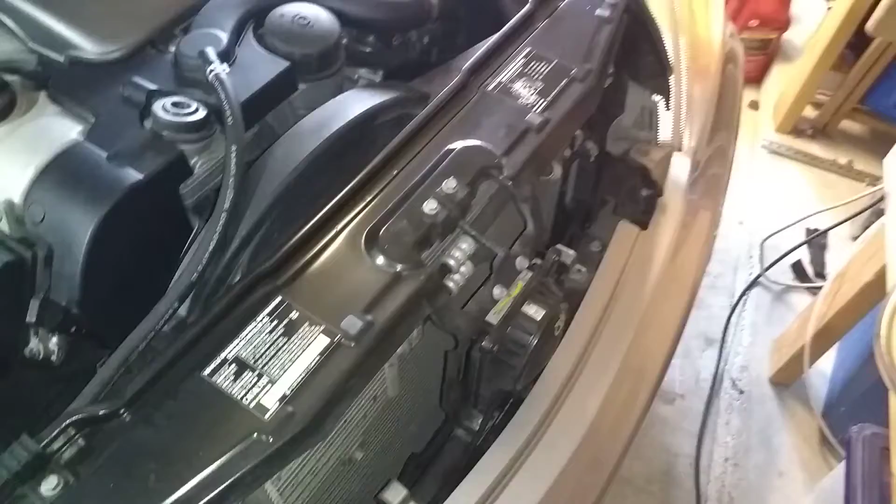So we got here a 2001 S600, W220 chassis. This is the version with the M137 engine. This is a Distronic upgrade I've been working on this weekend. So here you have the Distronic sensor. This is something I got off of eBay. I think it came out of a CL600.

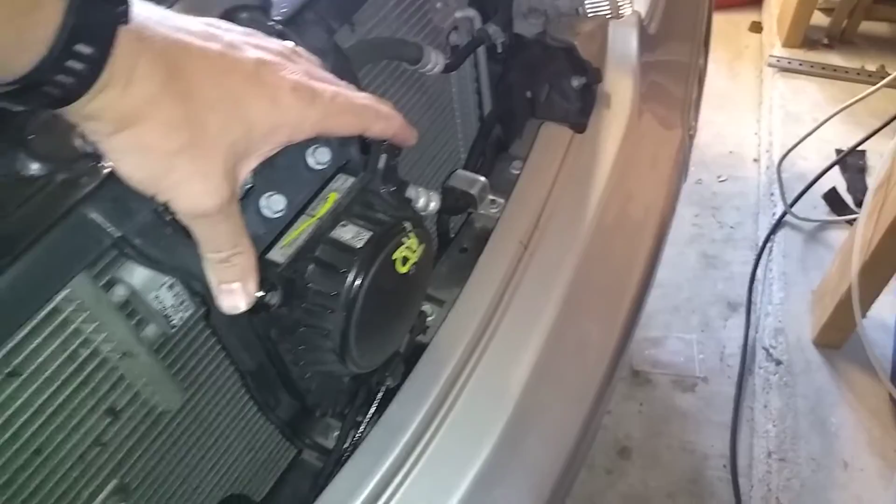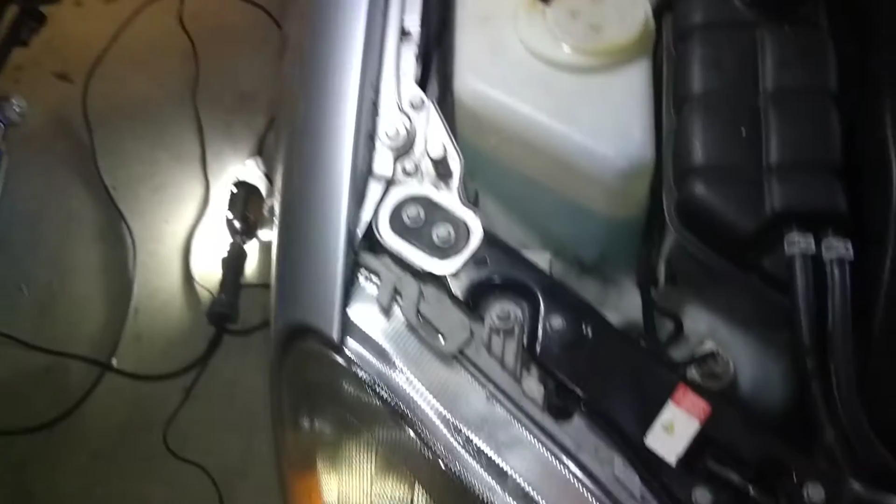Got the Distronic harness right here. The specific harness for this car was one that was only used for a couple of years, and it's not really available anymore. So this is actually an R230 harness, because these are much easier to get, but it's got pretty much the same cable output as the W220 or the S600, so not too much of a problem.

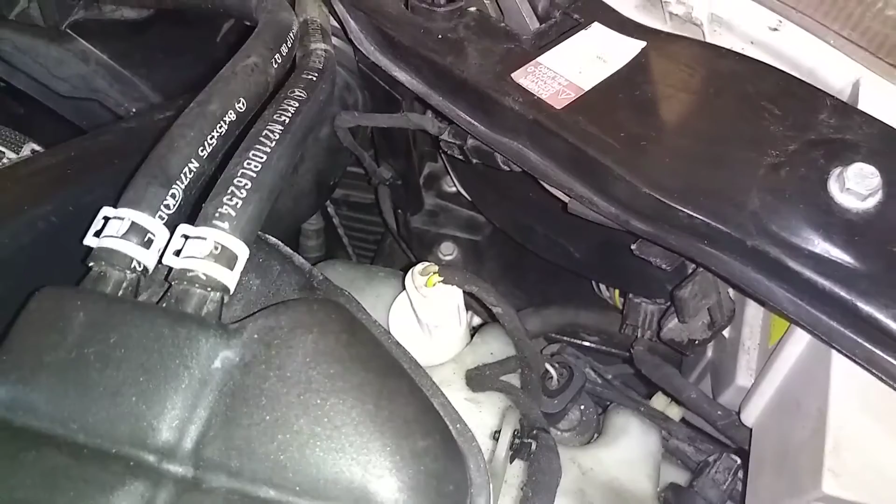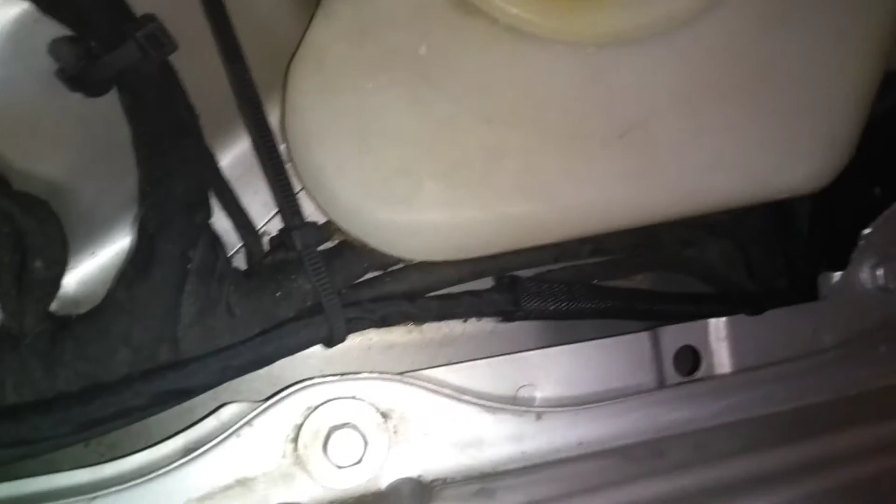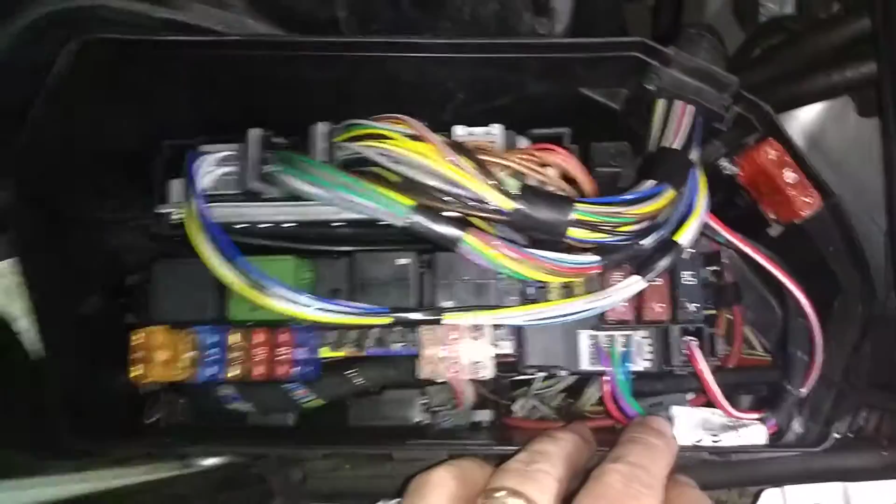I routed it underneath the headlight to make sure that everything went around properly. There was a little bit of extra slack here. It's just sort of loosely dangled under here. If you go around to the sides, see I routed the cable underneath this track here. This is more of the cable right here. It goes right into the right-hand SAM box and plugs into the second from the last fuse position right here.

Then it goes right through the firewall into the passenger compartment. There is a rubber grommet. You can see it right there in the middle of the screen. That's normally used by the R230 chassis. It's not necessary here because there's actually already a sort of a split grommet installed, and it's in the wrong spot anyway to kind of fit neatly within the race.

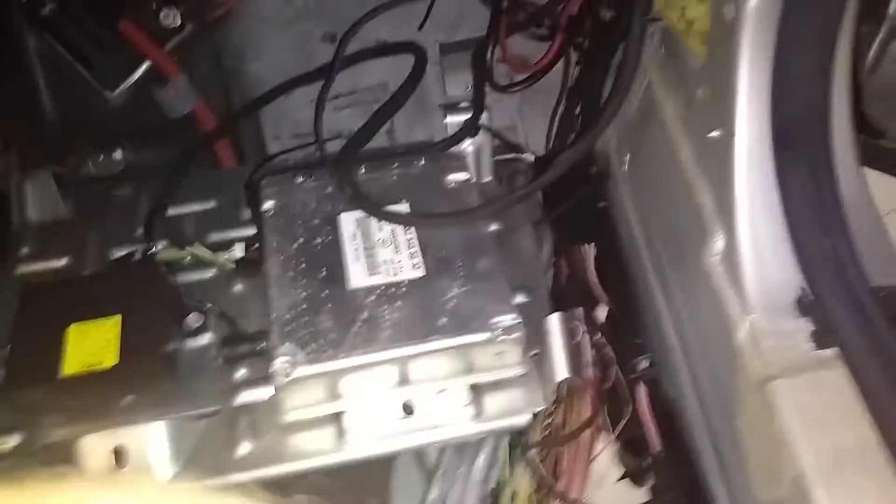Going around to the side, show you what else we did to get everything hooked up. Show you this before we button it up. So this is the actual Distronic ECU connected. We got the two connectors and the coaxial cable as well going out to the sensor. Over here is where it actually connected into the engine control unit, into the CAN bus. This is for CAN C right here. I got just a couple of solder joints.

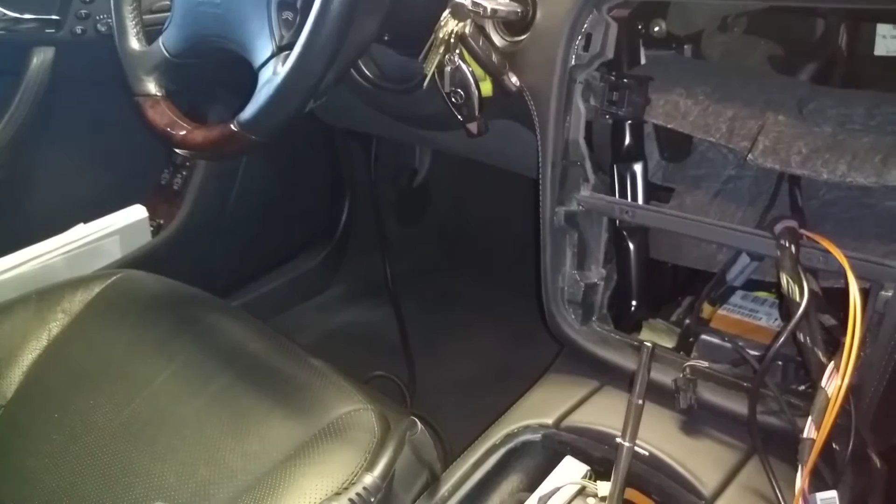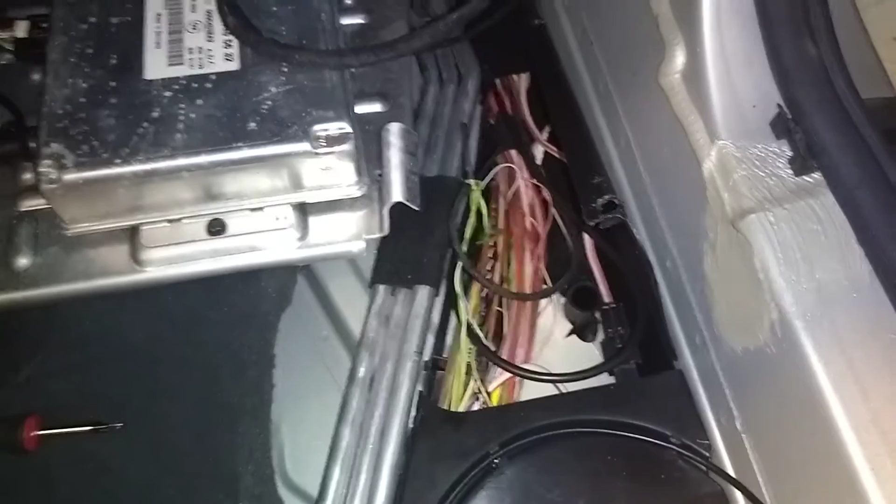This is the original wiring harness, the W220 wiring harness, and then this CAN bus wire here actually goes to the right-hand seatbelt tensioner. But normally what you do is you want to route all the way over to the driver's side and connect to the central CAN bus connection over on that side. But rather than doing that and tearing up the carpet on both sides, I just went ahead and wired it right into the seatbelt tensioner instead.

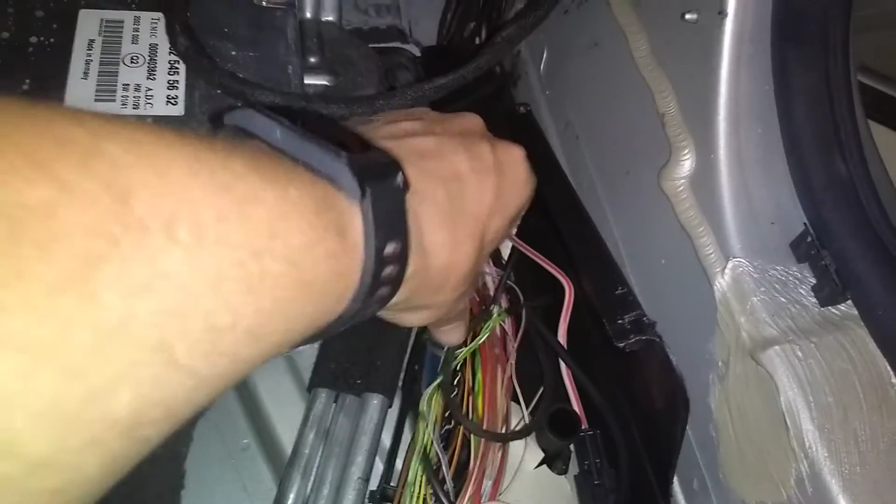You also need to connect to the diagnostic wire. So there's a pink wire on the W220. This kind of jacketed wire here is supposed to be pink. It's probably hard to see on the camera. And then this blue diagnostic wire also goes to the seatbelt tensioner. So basically all the wiring you need is right here in the passenger side, which is really convenient. So all you really have to do is take out this kick panel, plug everything in, do a little bit of soldering and some shrink wrapping, and you're good to go.

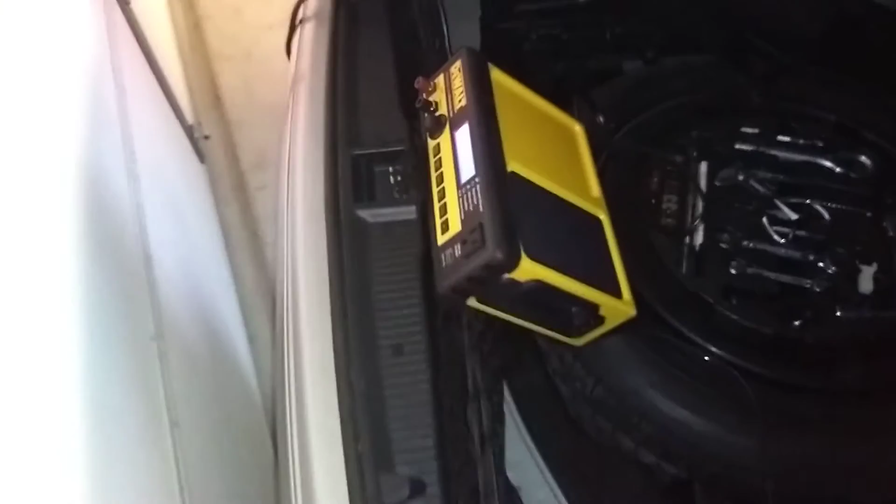So programming it was a little bit interesting because there's not a whole lot of documentation on how to do it. Here I've got a Star Diagnostic system, and it's plugged into the car right now. I'd say before you do any kind of programming, something that's really smart to do, and I kind of learned this over time, is put your car on a battery charger. I got this nice DeWalt unit here, 30 amps. The car uses 16.8 amps, just sitting idle without even the engine running.

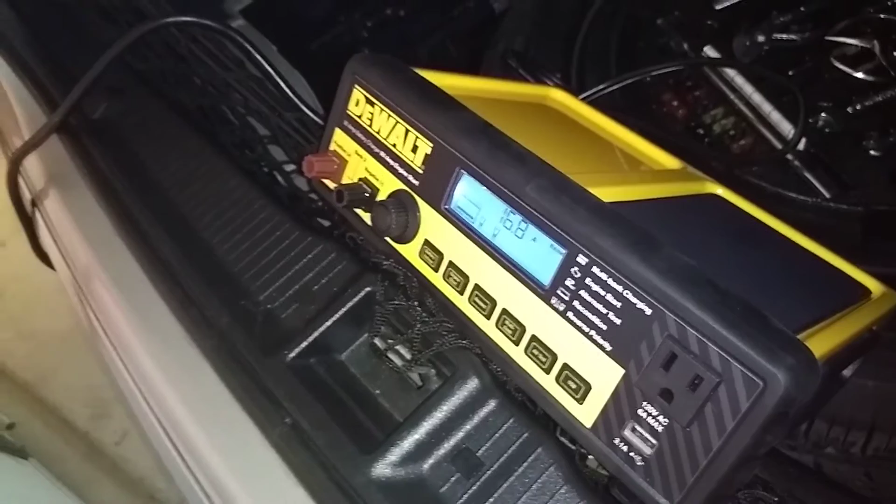So it will definitely be a big battery draw if you try to do any of this programming with just the battery, or you have to leave the engine running. So having one of these is really nice because it lets me keep the garage closed and not have to basically roast in a hot garage. Let's go ahead and go over here and take a look at some of the things we did for programming this device with the 2001 version.

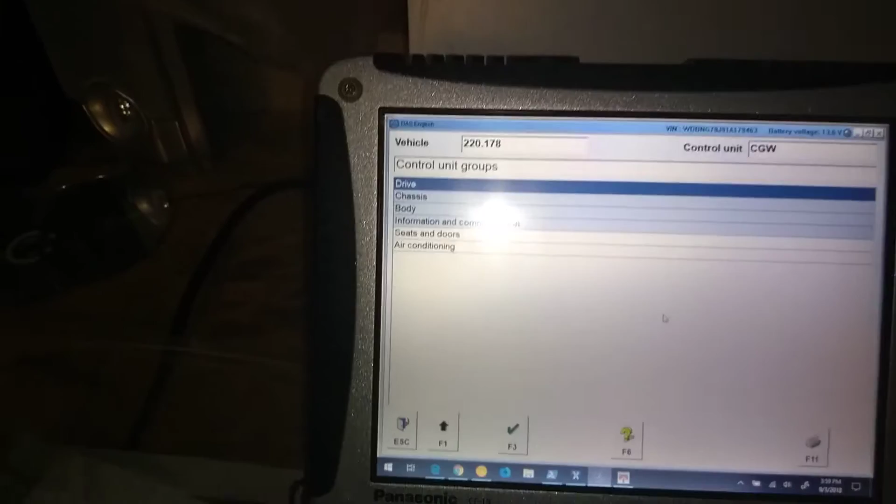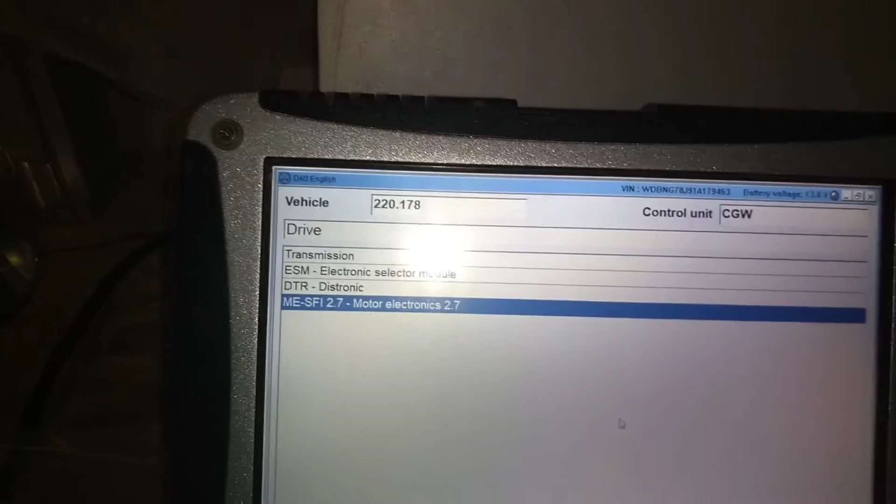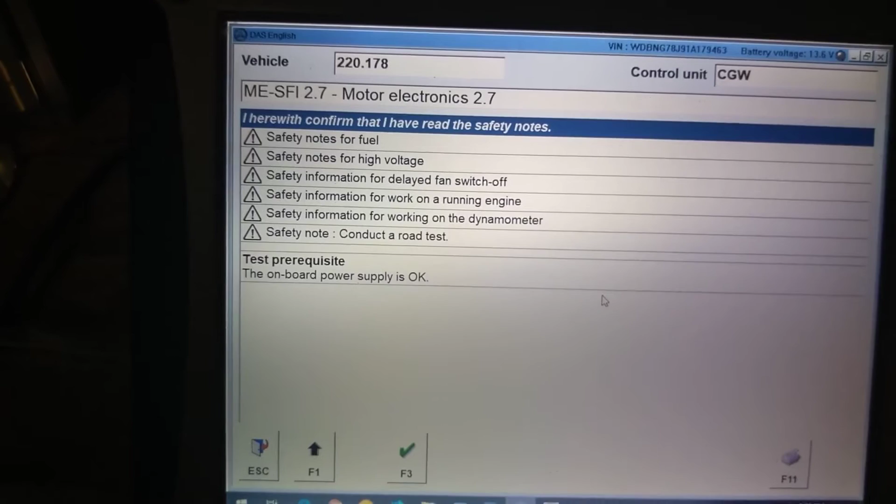So one of the first things you'll notice, so this is Star Diagnostics, I've got a wireless connection to the unit, is you'll need to update the engine electronics. I'm just going to turn off this light real quick. So this one has ME27, which is one I'd never seen before. All the other cars I've got have ME28 in them, but one of the first things you need to do when you start coding for this is, I'll go ahead and press F3, download all the adaptation data. If you don't do this, you'll get lots of funny errors, and it won't be really clear what's going on.

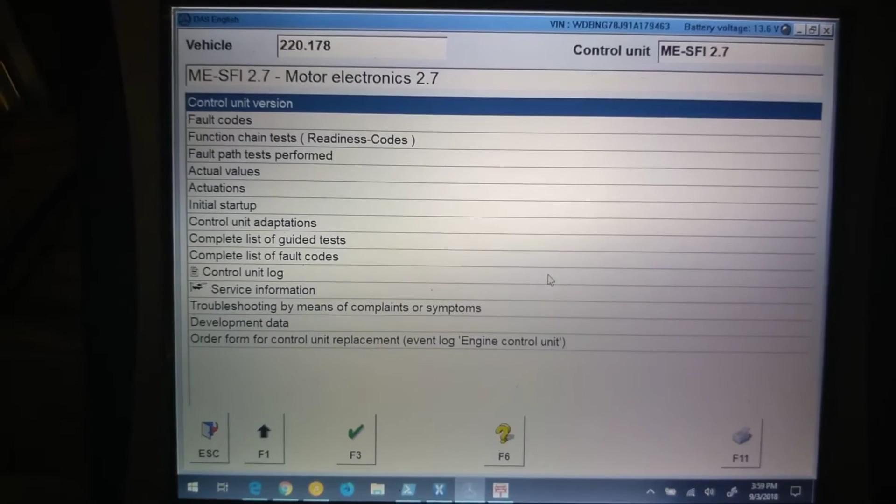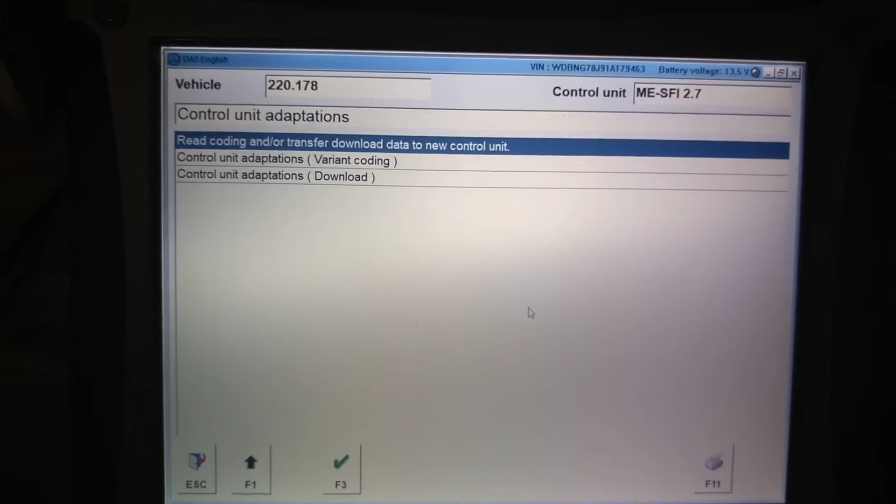So this is Star Diagnostic in development mode. You'll definitely need that to actually code everything. We'll go ahead and go into development data, and you want to go to control unit adaptations. Most people want to just go right into variant coding and fix things up, but everything will actually be wrong if you try to choose that. The first thing you need to do is read coding and transfer download data. I know when you go into variant coding it looks like it's reading the data, but it really doesn't work. So do this first. So just select read, say it's okay.

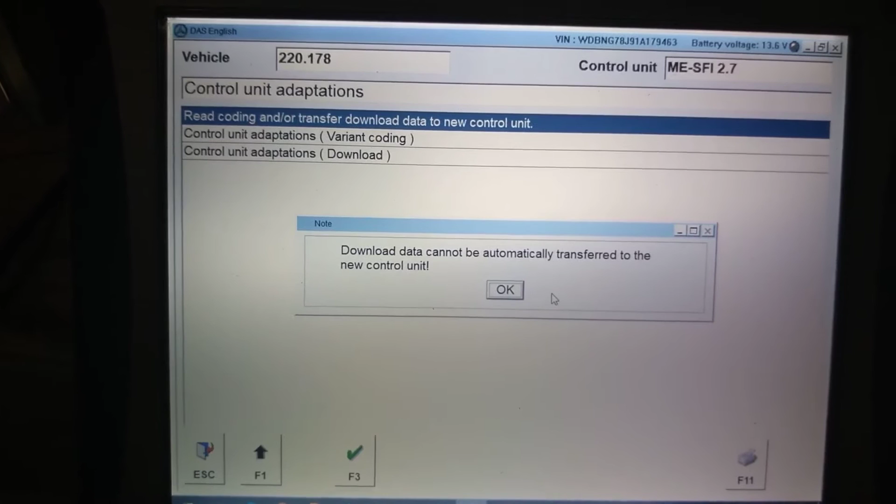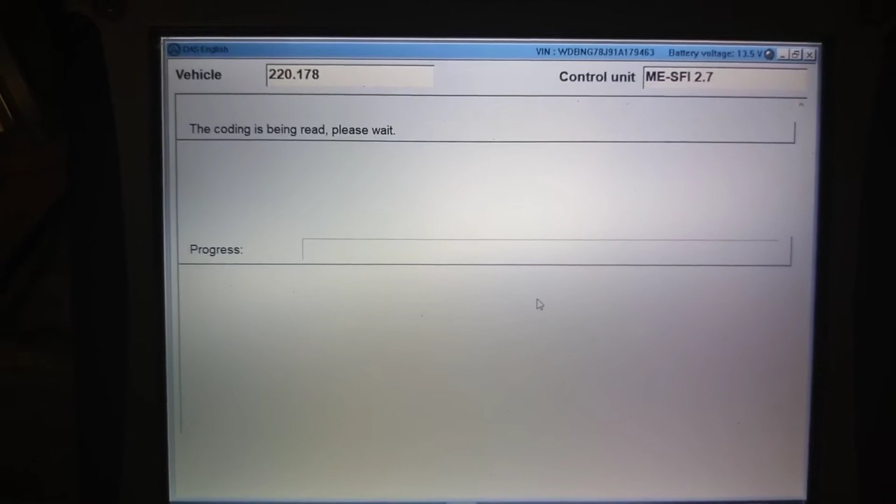Normally you use this screen to put a new engine ECU in. We're not going to do that, but we're just going to do half the procedure and then abort halfway through. So basically you wait for it to read all the data. It takes about a minute or so. And when it's done, we're going to have to toggle the ignition.

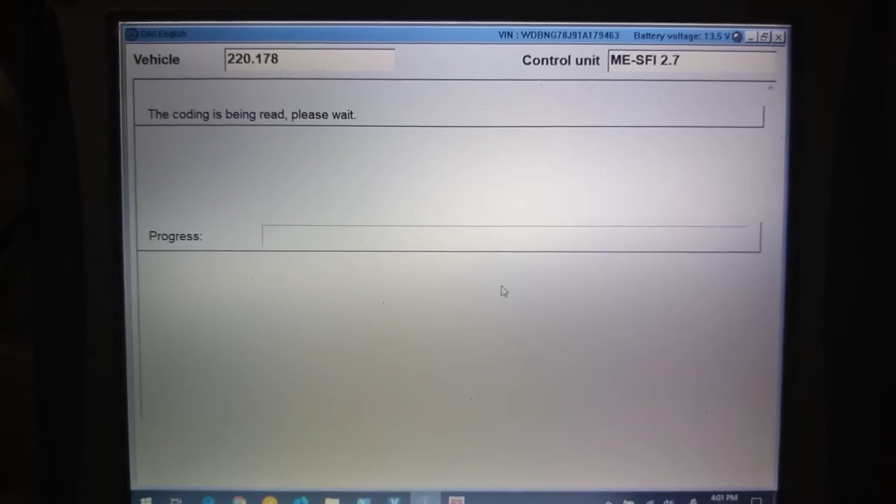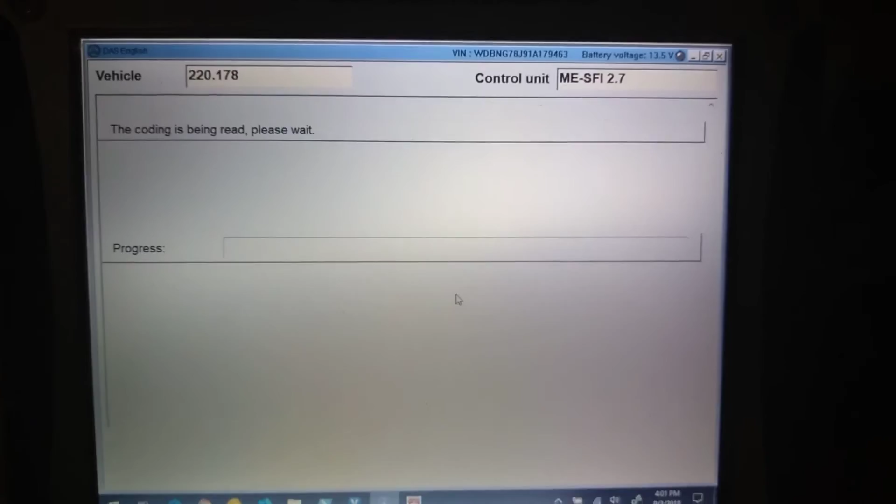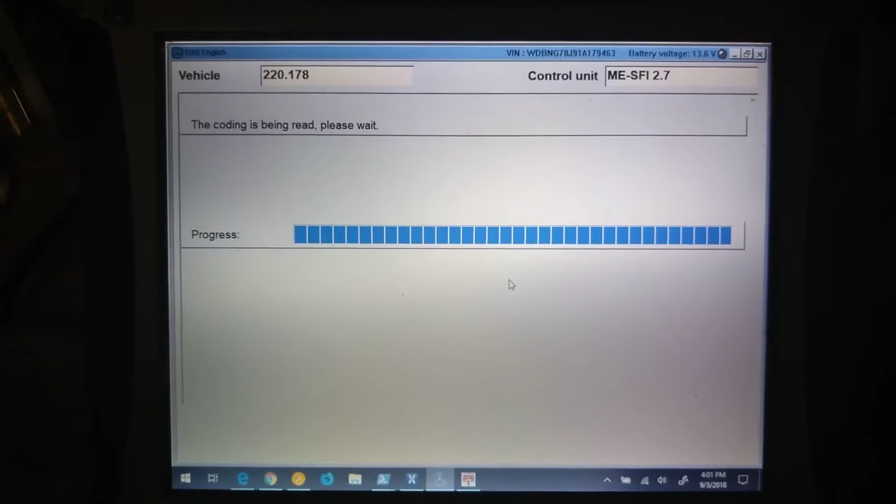While we're waiting for that, something else I normally do, because I use wireless for the connection to the multiplexer, I've got a Wi-Fi router out here. It makes it a lot more reliable to keep that connection up than if you were to have a router further away. The radio on the multiplexer is not really that good, so it disconnects at the slightest whim. So once it says coding has been read, we'll go in and toggle the ignition.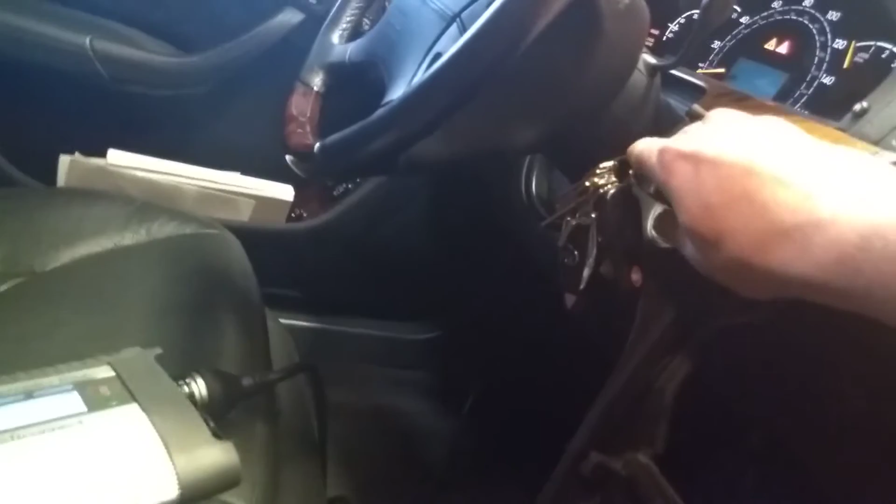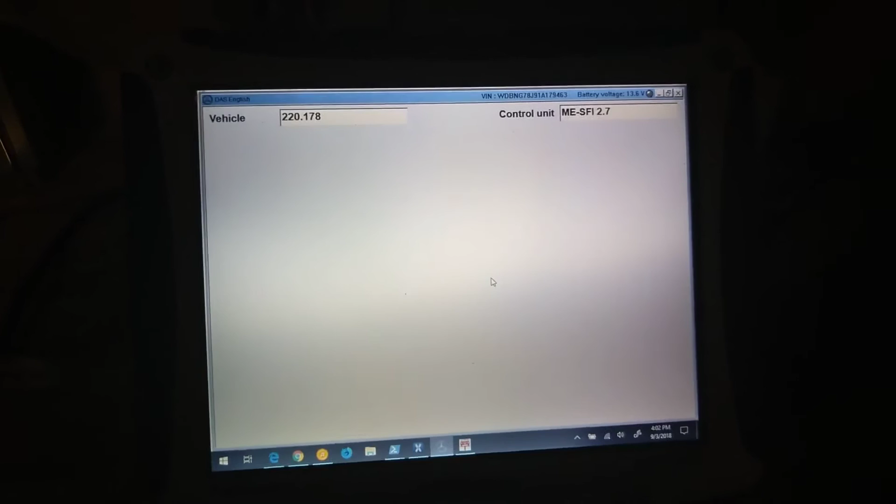So let's walk in here real quick, flip it off, turn it back on again, and let's go back over here, and it says it's going to be transferred to a new control unit. No, we're not going to actually do that right now, so we're going to hit F4. Let's see, there we go, and it should dump us back into the previous screen.

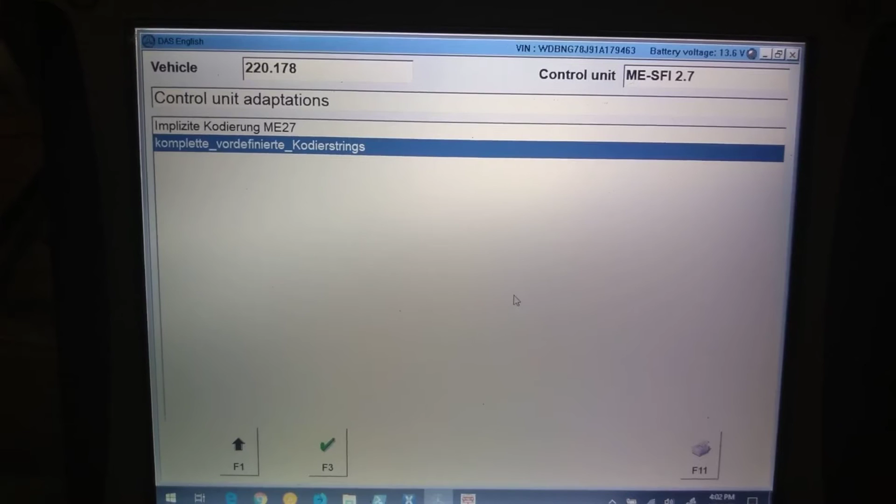So now you want to go not to variant coding again. Actually, you do want to go to variant code. I take it back. Go to variant code, and the first thing you want to do is the Kodierstrings. The reason why you want to do this is because by default the ME27 is not actually set up for any particular usage. That was kind of a surprise to me. But let's go ahead and take a look at what I mean by that.

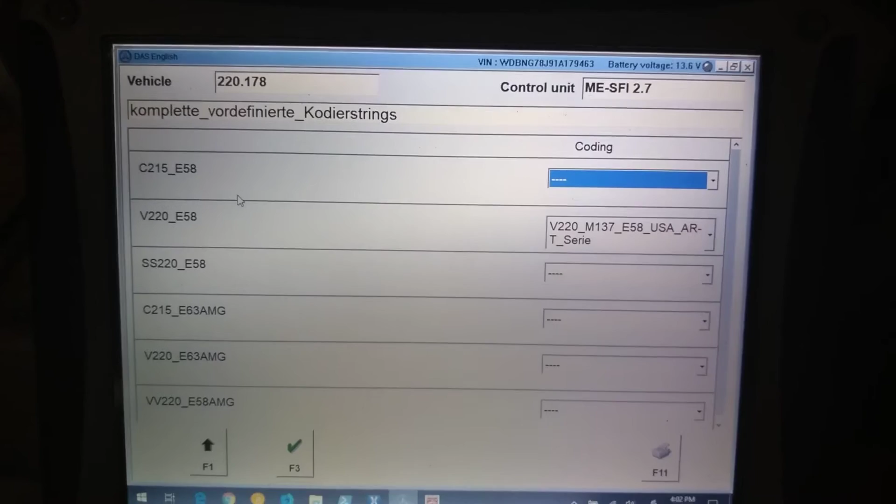So I'm going to go ahead and select it. It'll say that something's invalid. That's okay. When you first enter this screen on a virgin car, none of these fields will actually be filled in. This is a W220 that looks like a V, but that's German for you. That's got the 5.8 liter engine in it. So we'll go ahead and select the correct version from here.

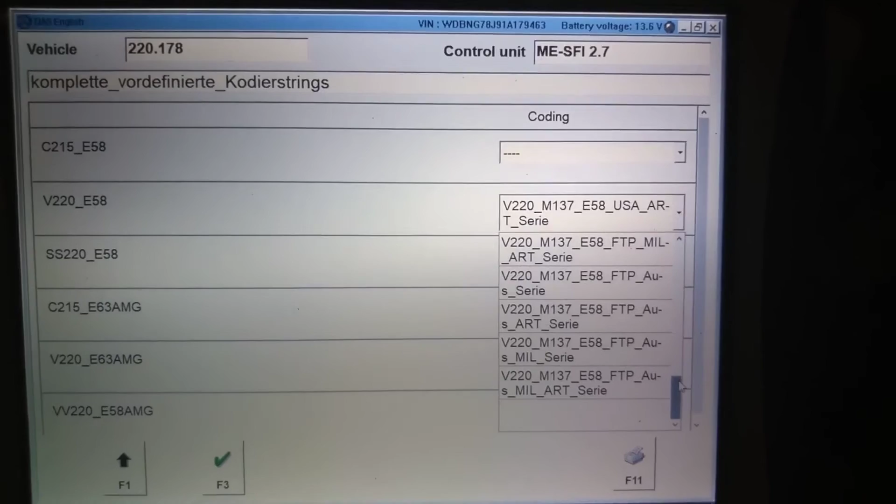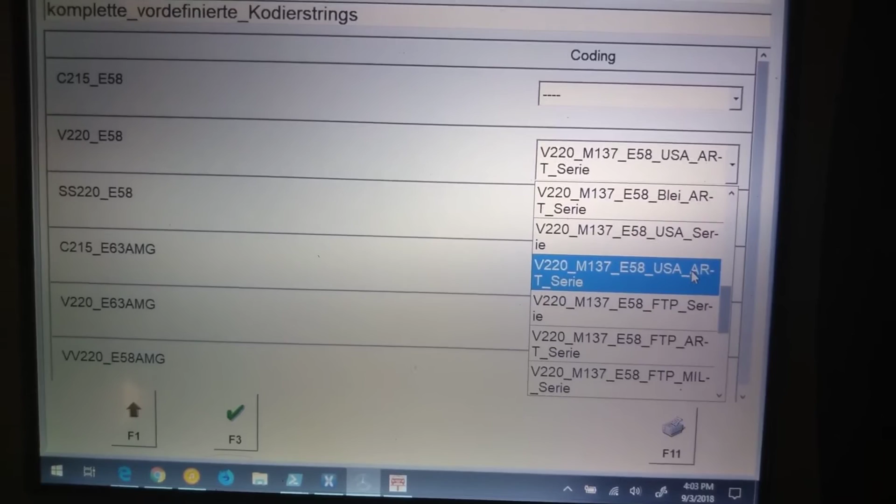So from this screen, you actually have a lot of things you can choose from. When I first looked at this, it was at the bottom, and I was thinking, what does FTP Aus MIL ART Serie mean? Turns out that's just region code. So you scroll up, you can see it there. This is a US car, and we've got two versions for US. We have US, and you've got US ART. ART stands for automatisch something. It's basically the cruise control. So you want ART turned on.

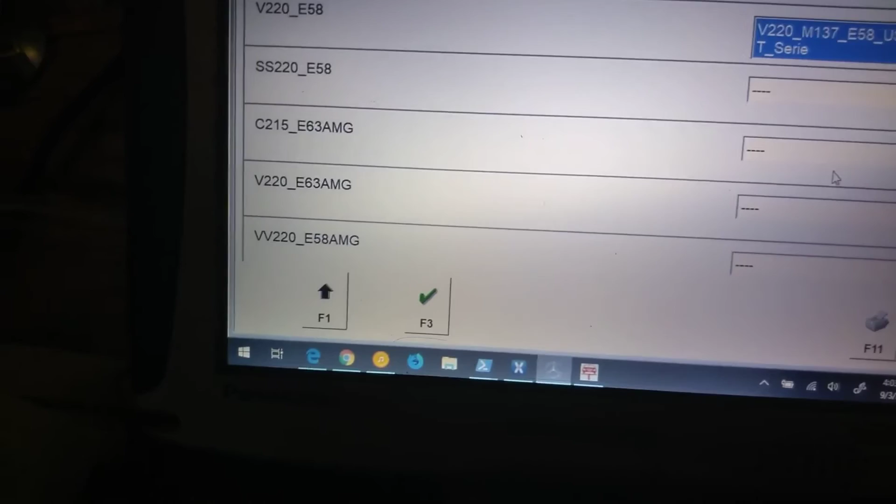So let's go ahead and select that one, and you'll want to press F3. I've already done this, so I don't really need to do it again, and apply that coding to the engine. You also want the engine to be running while you do this, otherwise it won't stick.

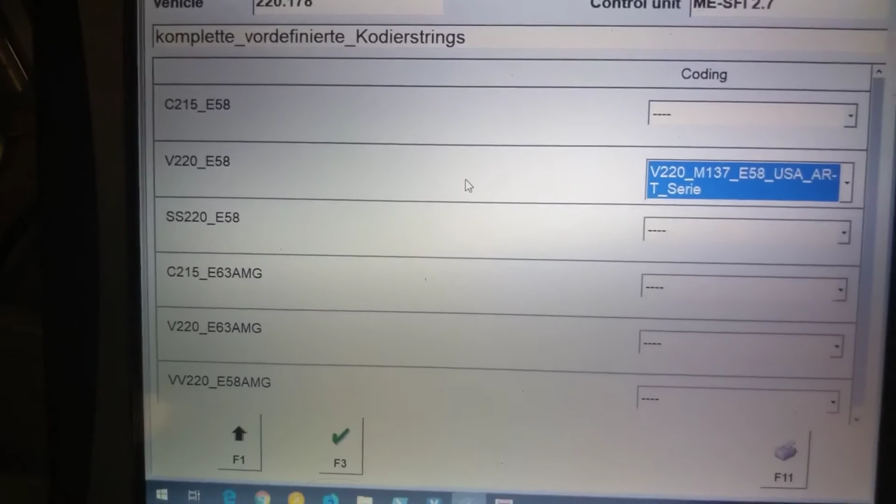So effectively, one of the first things you want to do when you start setting this stuff up is to select the correct variant for your car, from the W220, or if you got a CL, a C215, really depending on what body you have. You just need to choose the right engine variant that has ART in it. Otherwise nothing will work. So I'll just pretend that I applied that. We'll go back. Once you've applied that, you'll go through a whole other sequence.

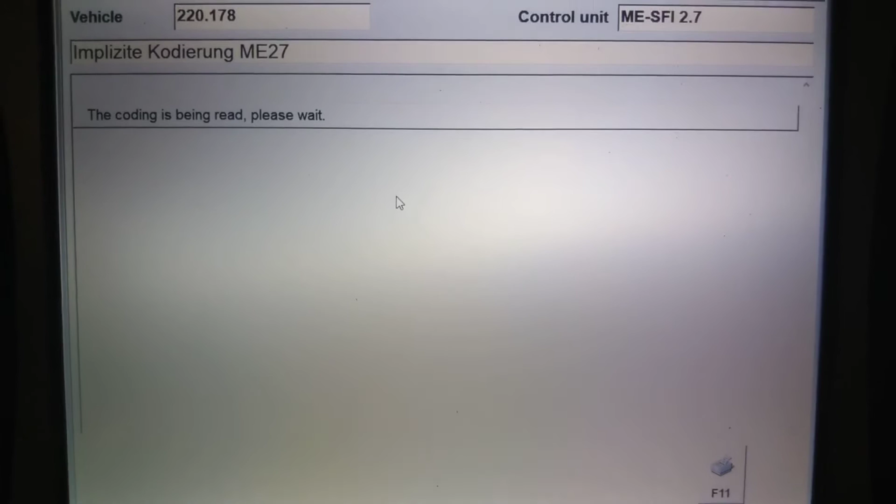You'll want to go to the implicit coding for ME27, and it will read all the values. Again, it's kind of lying. It doesn't really read them. It read them earlier when I did that big bulk read. But we'll go ahead and see what it pulls up. Again, it'll say something's invalid. It's kind of a lie. I'm sure there's something invalid, but I don't know which it is.

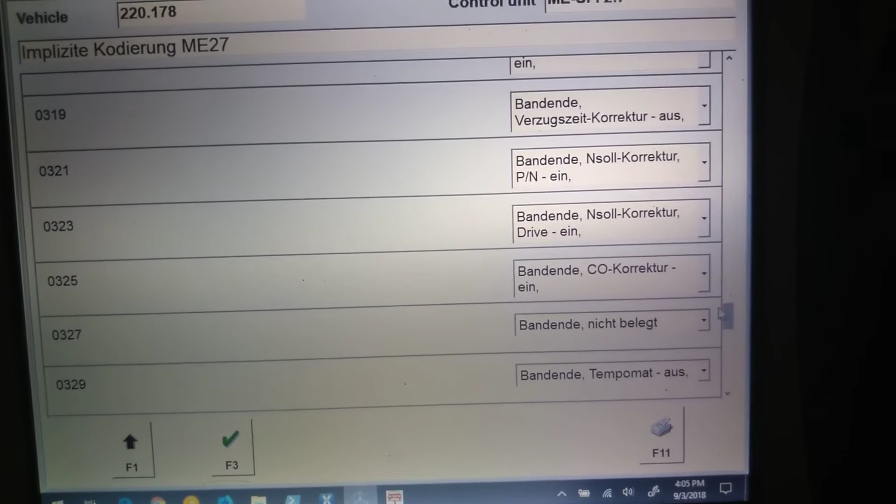So if we scroll down here, the other thing you want to select when you're setting things up is going to be under, let's see, where's it at? Bandende. You basically want to turn off the built-in cruise control, because you don't really need two cruise controls in a system. So right here where it says Tempomat, that's the built-in cruise control in the ECU. You want to say aus, which means it's removed rather than installed. That basically tells it to ignore the built-in cruise control. You also want to press F3 and apply this change as well.

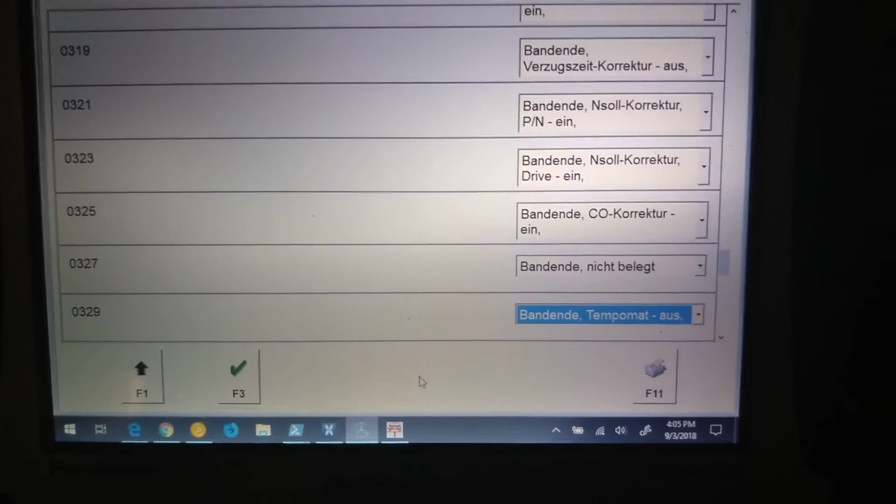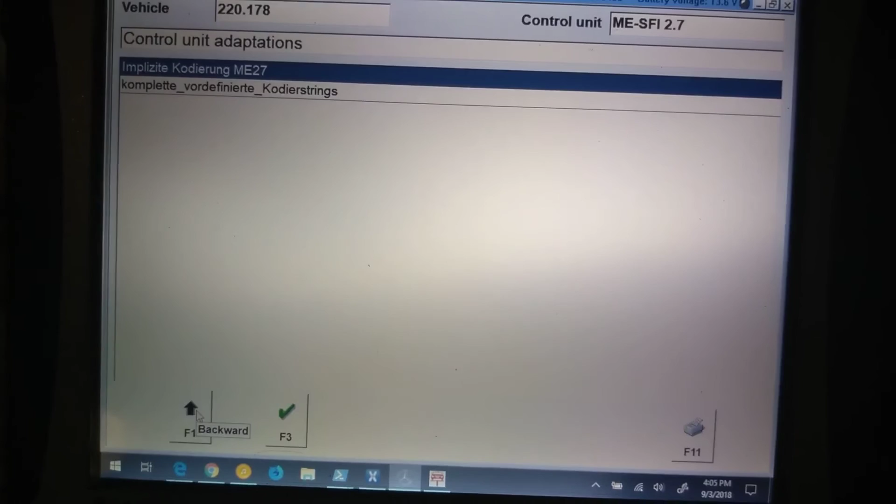On other cars, this is called something else. It might have ART in the string. This car is early enough that they just didn't bother making the string say ART, so we'll just say that's good enough. So those are the two main sticking points I ran into coding this engine, because no one really ever mentioned that these things were required. I just basically went through trial and error to set it up. Once you've applied that, everything else is pretty easy.

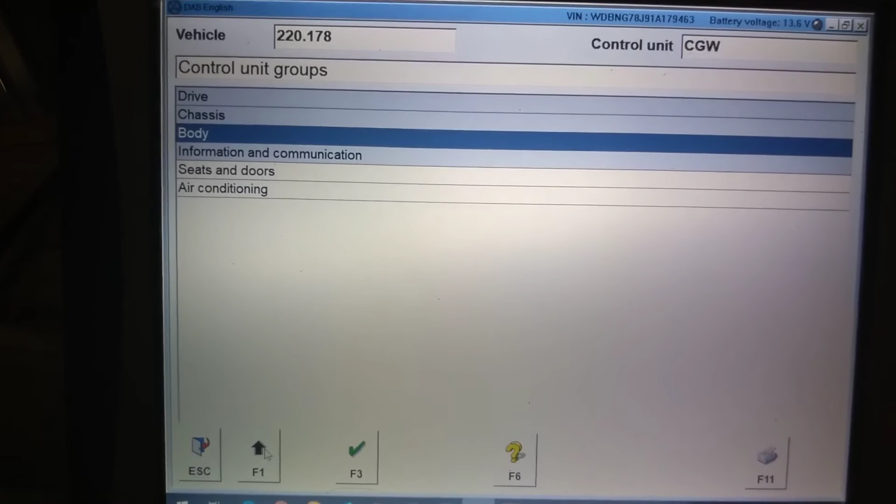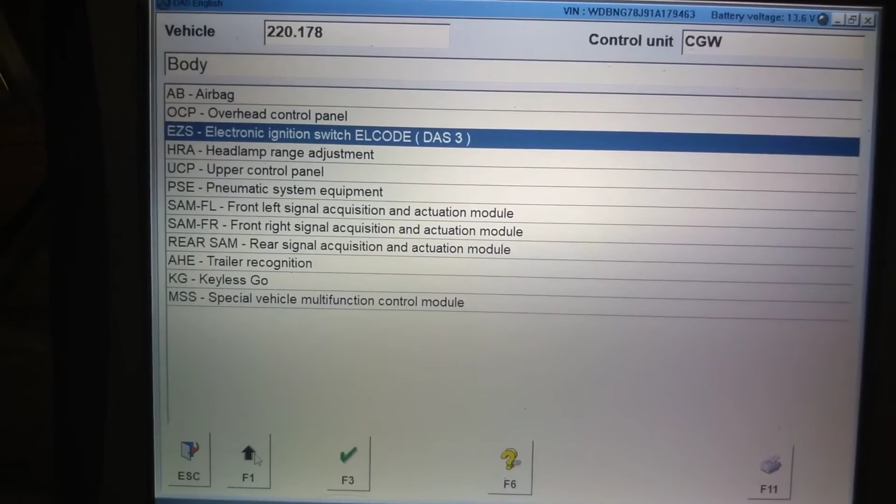The other things, of course, you'll need to set up will be in your chassis. Actually, you don't really need to do anything under chassis, if I recall correctly, but you will need to do something under body. You need to go to EZS, which is kind of like CGW, and you'll need to turn on Distronic there. Sometimes people say that you need to set it up in CGW, but in this particular case you need to go to EZS instead. And this will also be under development data.

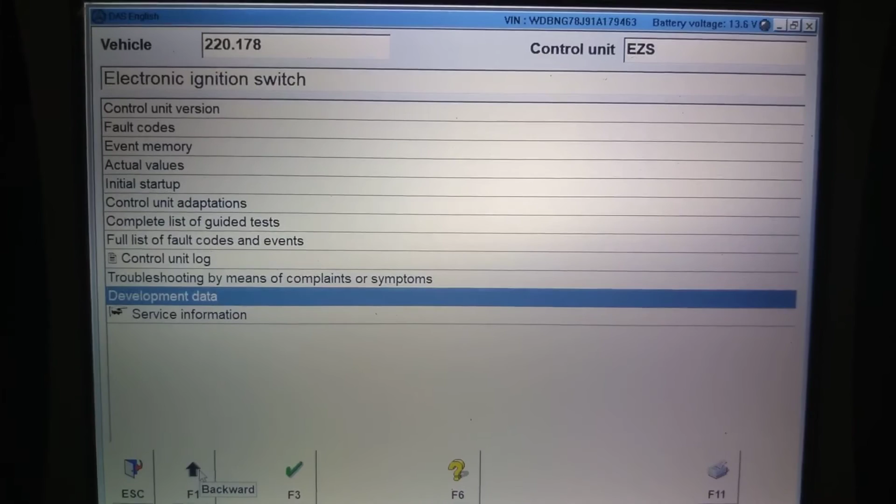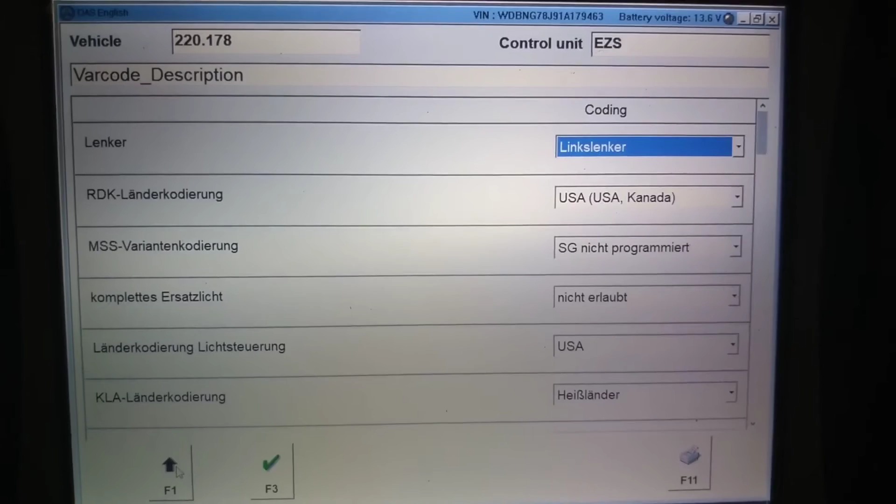Control unit adaptations. And in this one you can just go straight into variant coding. I know it's kind of an inconsistent interface, and just select var code description. And the particular piece of German that you're looking for here is going to be called, let's see if we can find it. It's so all over the place. Let's see. There we go. We want the Abstand Regel Tempomat, and you want to put that as vorhanden, which means installed. So there we go. So you turn that one on, and that basically allows everything else to talk to that guy.

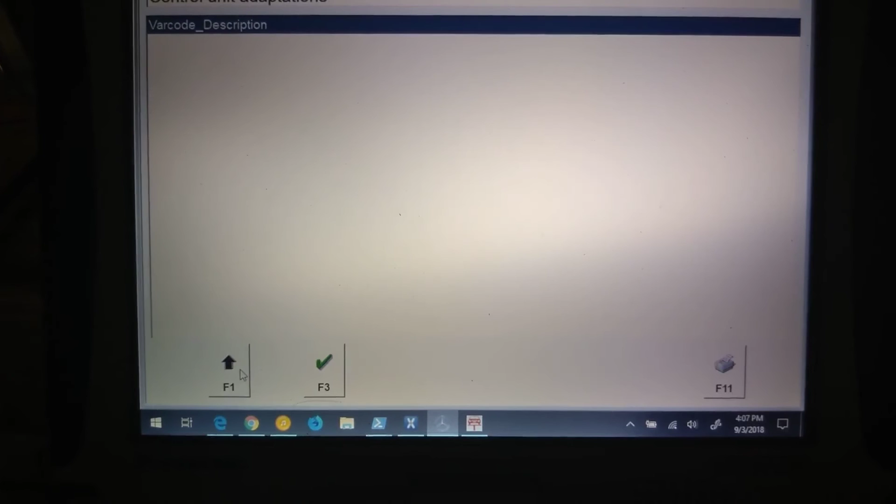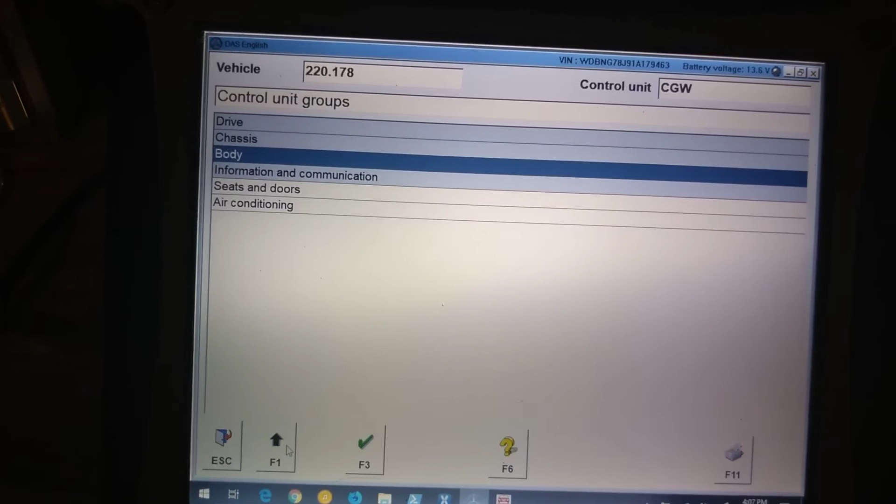If you do not set that up, you'll not actually be able to communicate with the unit properly. If you don't set the engine ECU up, you'll get ESP errors, you'll get brake assist warning errors, and you'll get a bunch of errors from the DTR system itself, where it will say that it can't communicate properly over the CAN bus. It'll say there's an internal fault and all that kind of stuff.

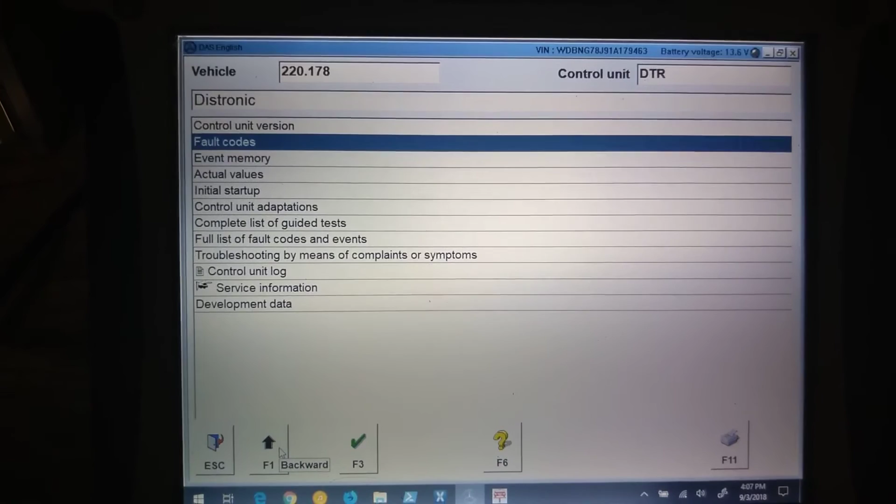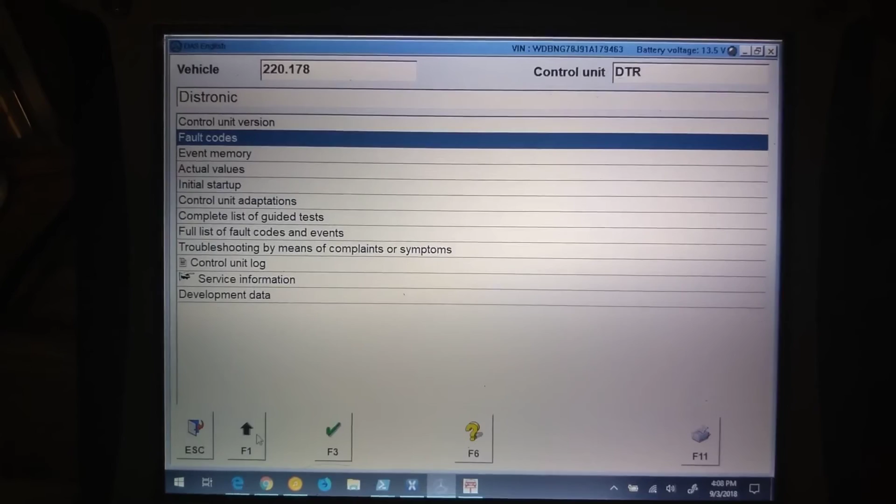So basically what's happening is the engine is seeing messages on the CAN bus it doesn't expect. The ESP and brake assist, they're all seeing messages too, and so they're kind of freaking out and disabling themselves. You basically have to tell everyone, hey, it's cool, these messages are expected, by turning on ART, and that allows them all to be happy on the same CAN bus. So you can see here I've got a pretty happy system. There's no fault codes showing up in DTR.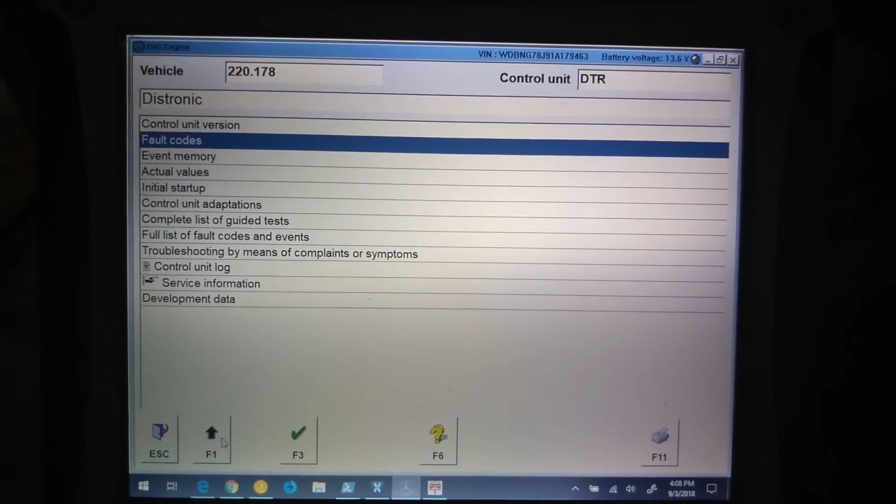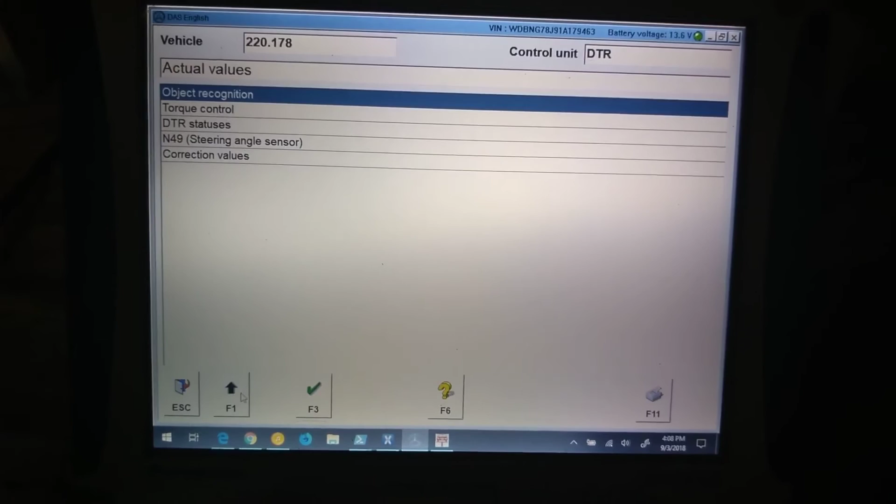You can of course do some other interesting stuff too. You can look at actual values and see if the DTR system is working. If we go into like DTR status or object recognition, you can sort of play around with it and see what it actually sees through the radar sensor, which is kind of a fun thing. Go back. Let's see, what else can you do? Other guides will say you need to run initial startup. You definitely do need to do that as well, basically when you install the unit in the first place.

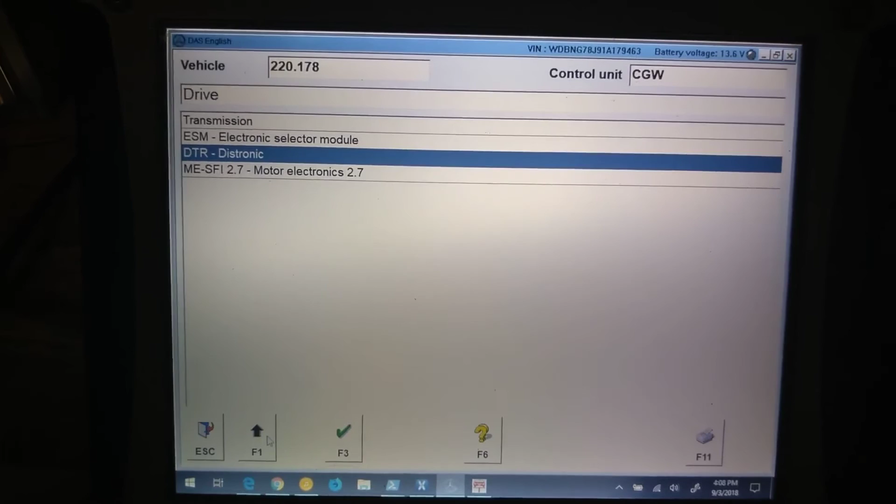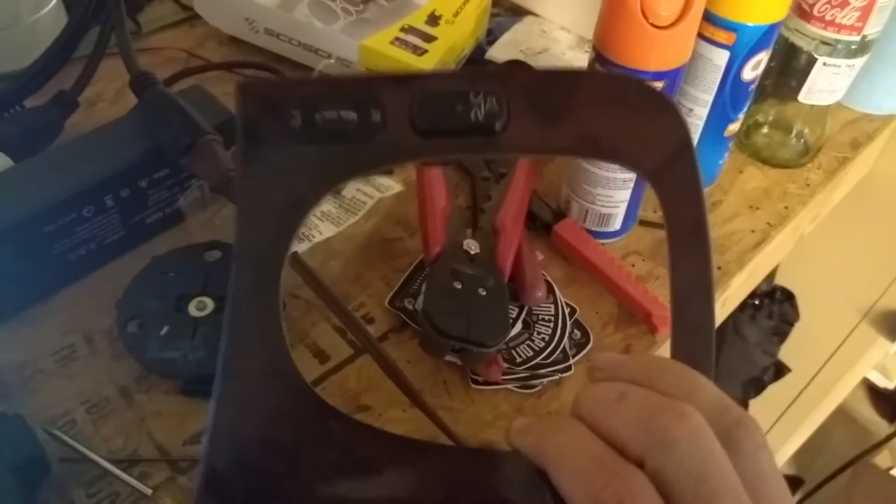Something that I've got to do that I haven't done yet is coding in the upper control panel to support the switches. You see here I've actually got the switches out of the car. I don't have them installed yet because it turned out this car from 00 to 02 requires a very specific wiring harness, and so I followed W220.EE's recommendation and bought what they call the minor harness. I'll show you where that's at in a second.

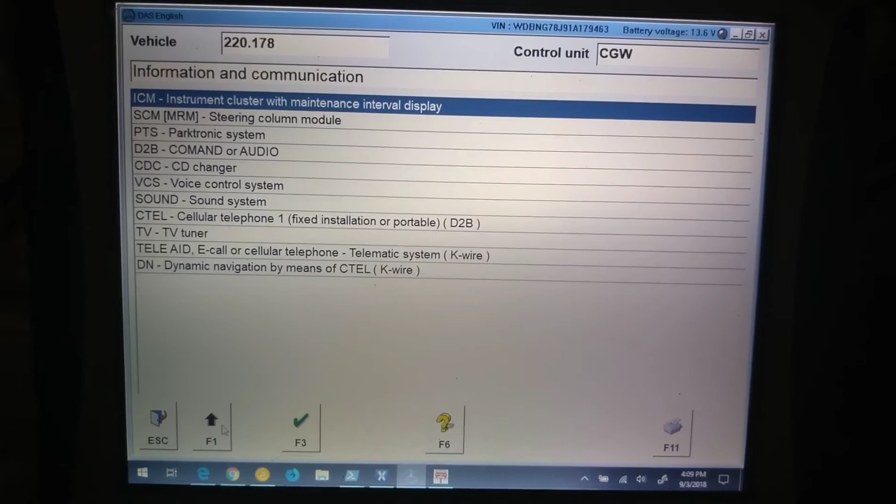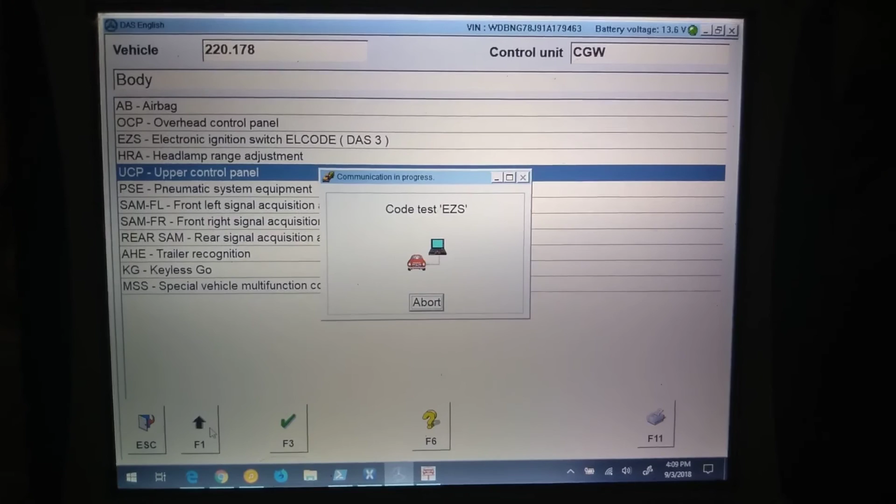You can tell it's not hooked up because if I go to, I believe, information and communication, nope, that's not it. Go back. Maybe it's under body. Yeah, upper control panel. And if we look inside of that, you'll see there's a fault code right now. Let's pop it open real quick. Sometimes these systems take a little bit longer to talk to than others. Make sure I'm still connected. Yeah.

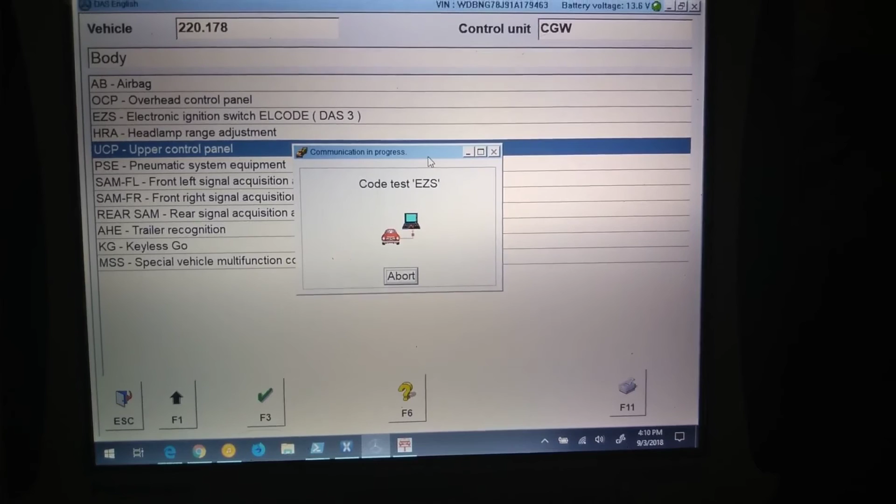Well, that doesn't seem to want to load right now, so maybe I'll go ahead and splice something in for that later. But basically what it will be complaining about is that it can't read the potentiometer switch. So as a word of caution, if you have these old 2000 to 2001 pre-facelift switches, the normal harness to connect it to the switches down here is not going to work. There's only 6 pins for the connectors under here. I actually took this wood off to take a look and actually read the model number because it's written on the top of this thing.

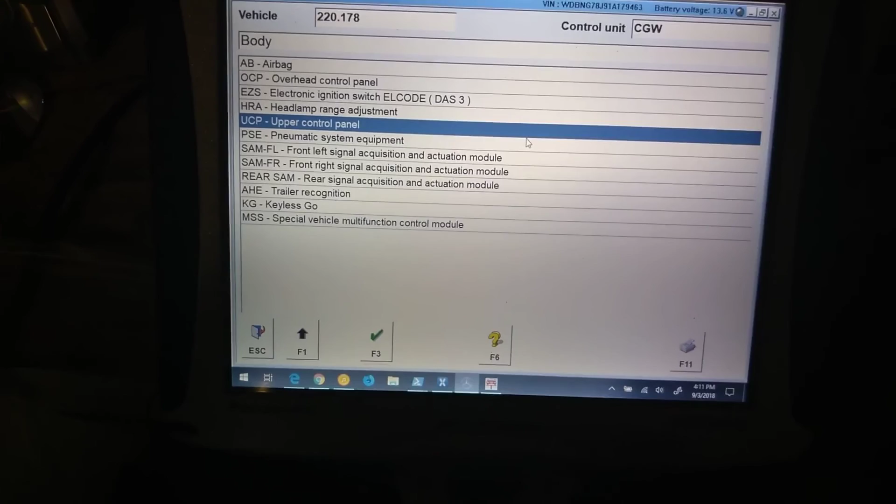So what you actually end up having to do is getting an older version of the cable. If you look at the electronic parts guide, you should be able to find the right cable. It's a little bit misleading because it directs you to the newer cable almost all the time, and so it's difficult to find the reference to the old cable. What I ended up doing was just putting in a fake car into the parts system and twiddling with it until I found the right one.

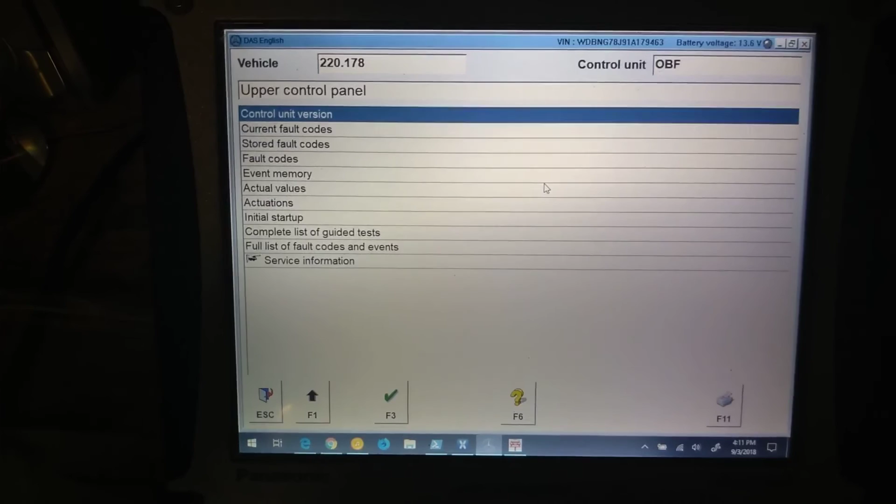So anyway, we got upper control panel to load, and here you can see if I look at stored faults, you can see it says that the voltage supply to the DTR potentiometer is faulty. So I'm going to wait until I get that, test everything out and button everything up.

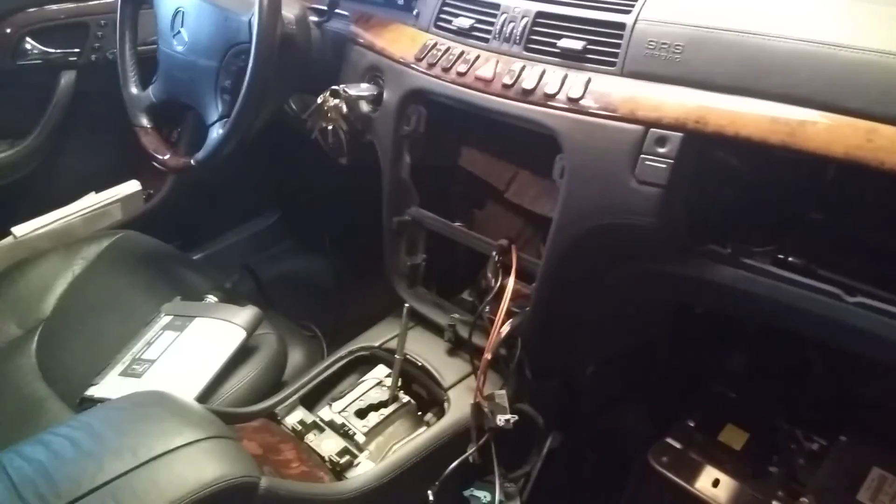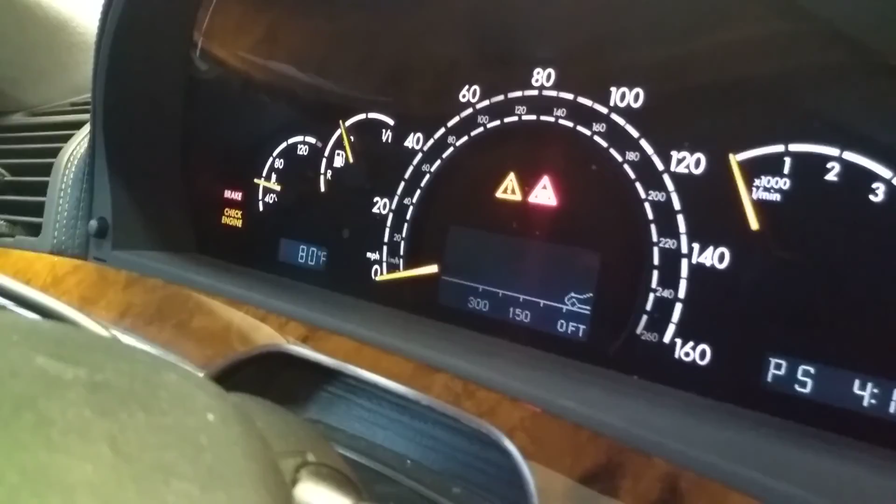But as you can see here, kind of in summary, it's not that hard to connect Distronic into a 2000-2001 car, W220 chassis. The catches are, of course, almost everything is a little bit different than all the other cars, so you'll need to perhaps experiment a little bit. Make sure you update the ME to the right version, and everything should come along pretty nicely. But you can see here, I got the cool Distronic display, and everything looks like it's working okay, at least in theory. At least there's no error codes. We'll test it out later.